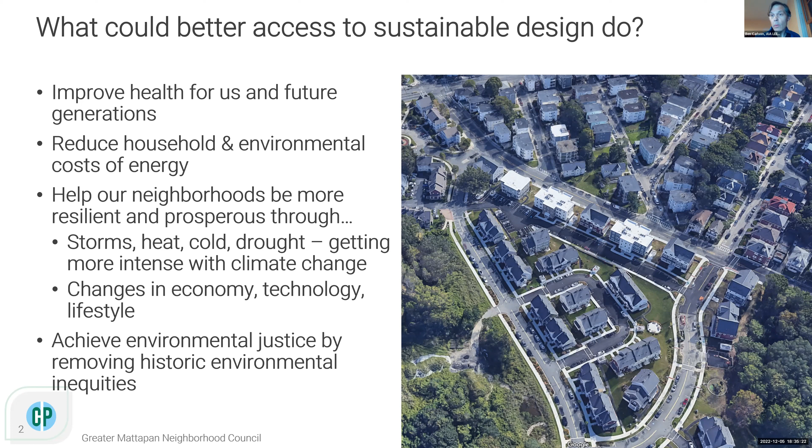And it can help with environmental justice, because oftentimes Black and brown communities have been impacted by too much loss of tree canopy, of environments that are not healthy, and so now we have opportunities to really bring healthier and better places to live for everybody.

So what does LEED mean? It stands for Leadership in Energy and Environmental Design. It's a very common standard for sustainable design of buildings, but also neighborhoods, and starting to be like city scale too. And you basically earn points.

There's different rating systems, but you can earn up to about 100 or 110 points. If you get 40, that's where you begin to certify a building that it's a LEED building. And then you've got silver and gold. But a lot of the strategies, you don't have to certify your building. There's still a lot of good ideas and strategies that can be applied on a small scale in our homes, in our yards, on our streets, in ways that make a difference.

So I'll skip over this, but that's what LEED is, just a prevailing set of environmental standards. I'll share some examples of the standards, I won't go through all of them, that would take a while. But the general categories, to give you an idea, are these.

One is location and transportation - that's picking a good place to build your building or locate your business or your home. And the great thing is Mattapan is already an excellent place. Essentially, what the location and transportation standards are all about is helping people live and work and play in urban neighborhoods. Mattapan is a great example of that, and not all parts of the neighborhood maybe meet the greatest standard in terms of access to transportation or schools or other things people want, but in general it's good. A lot of it is very walkable.

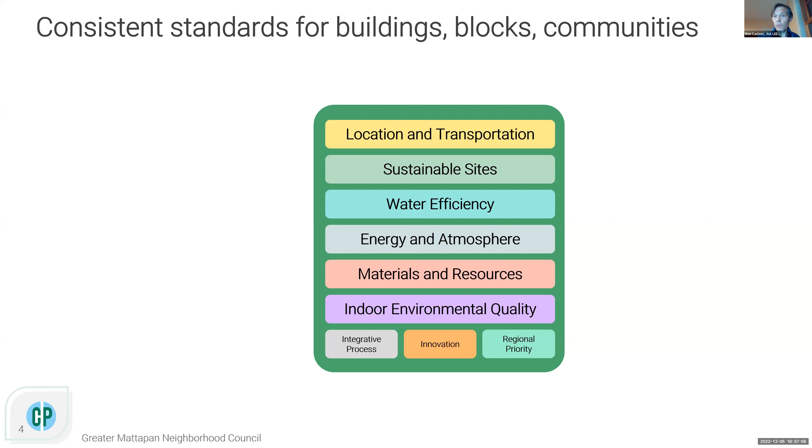There's water efficiency, which is using as little water as we can. A big part of it is energy and atmosphere, minimizing our energy use, reducing emissions into the air. Materials and resources - using materials for building that aren't causing damage to people or the environment. And there's indoor environmental quality, which is creating healthy interiors, places people feel good to be in. Those are the main categories.

And there's a set of standards that apply to buildings. This picture here is actually the Mattapan Public Library, which is a LEED certified building.

And then there's a set of standards that apply to communities. This is the Old Colony Public Housing, which is up next to the beginning of South Boston. That's a LEED certified neighborhood. But it's the same major themes that apply, whether you're talking about one building or a whole series of blocks and streets. So these themes really carry over.

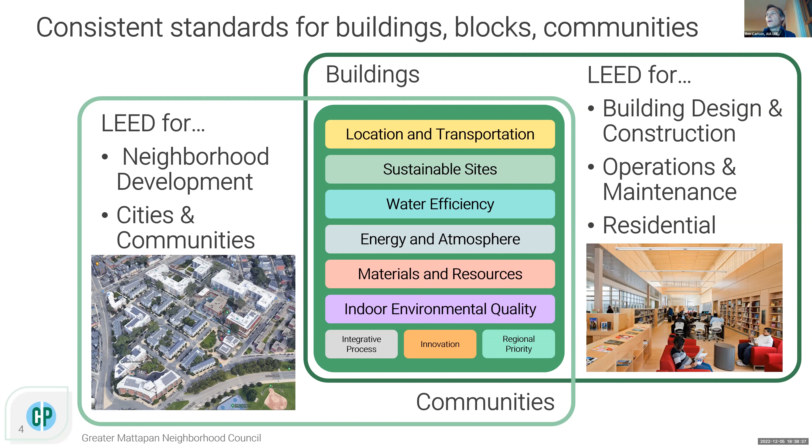There are other standards we won't go into in detail, but there's something called the Well Building Standard, which is about health, and it takes that a little further. There's Living Building Challenge, which focuses on energy - it also gets into equity and beauty. There's something called Passive House out of Europe, which is very common as well. And even Boston Schools has green standards, healthy standards for buildings. So there are a bunch of good models out there.

All we need to do is apply them and find a way to start applying them to Mattapan. So one of the perspectives to think about is tree canopy and heat, because those are a big part of staying healthy and reducing heating and cooling costs.

So I'm going to just quickly walk through a few example ways these might apply. I'm not going to read all the examples, but when we think about location and transportation, you get points for choosing the right location. So one project that comes to mind that's a good example of that is this housing that's, I think it may be done now - it's the old Cote Ford site, Cummins Highway, near the new commuter rail station.

And that's an example of a good location - I think, unless you live across the street and you don't like it - but it's a location that sat for years as an underutilized site, so it's good to get it back into use. Good to have people there and lights on, and you can easily walk to Mattapan Square, to the train and to the bus. So it's an example of a good location.

The city also has incentives for electric vehicle charging. So this theme sort of gets into transportation and access, and putting people's homes in places where it's easy and convenient to live and get to work.

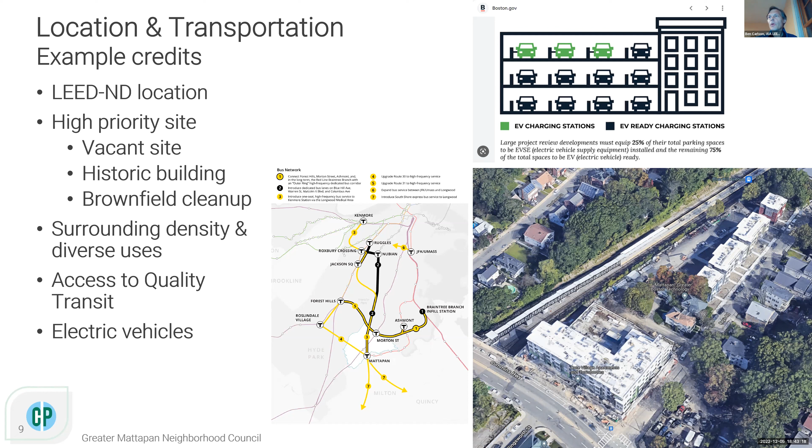Sustainable sites is a lot about green areas. It could be tree canopy, green areas at ground level, or on rooftops to soak up water. Green roofs are usually on flat roofs, but some people are even putting them on sloped roofs.

But how do we help a homeowner afford a green roof like this? Look at all this opportunity we have around Mattapan Square to green these roofs. This white roof here is going to keep things a lot cooler on a hot day than all these black tar paper roofs. So there's a lot we can do just working with our rooftops that'll make our environment more pleasant.

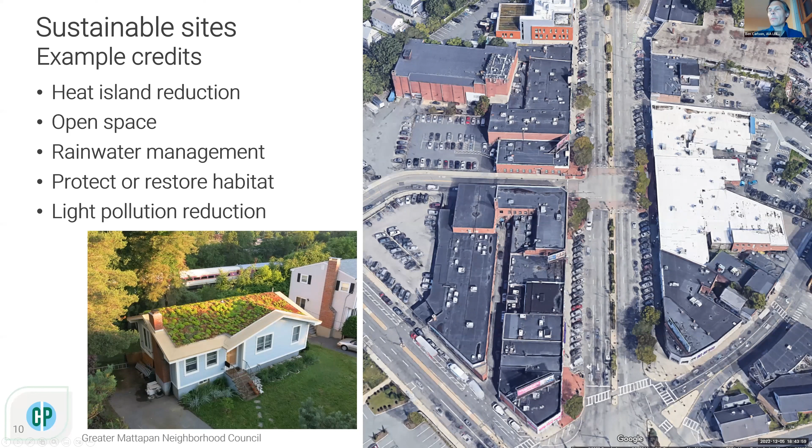Being efficient with water, there are toilets and other fixtures we can buy here in Boston that use less water and lower our water bills.

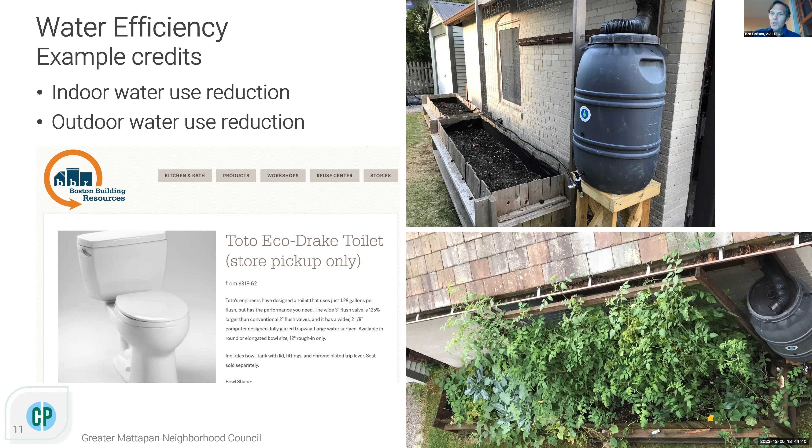This is actually in my backyard. This is a rain barrel that's useful in a couple of ways. It collects water off a roof. It helps nourish this garden, which is helpful when it's really dry. The rain barrel has also been helpful to me because, put in the right place, it reduces the water leakage into my basement, which used to happen when it rained a lot. But now the barrel is collecting that, it's not so much. So this is an example of a small scale, easy solution, but that helps.

So the other one, energy and atmosphere. There's a huge opportunity now where we have heat pumps, and believe it or not, it's basically the opposite of an air conditioner. Just as an air conditioner can make your interior cool when it's hot outside, the new heat pumps, even in a winter climate like we have, can make your interior warm when it's cold outside.

That actually uses less energy than a traditional gas or oil furnace, and it can use clean electricity. So there's a big opportunity, when it comes time to replace our heating plants, to use these more efficient solutions. It's also a lot about insulation, insulating our older buildings, putting in newer windows. If you're a business, it's also about efficient refrigerators and careful use of refrigerants so they don't escape into the atmosphere.

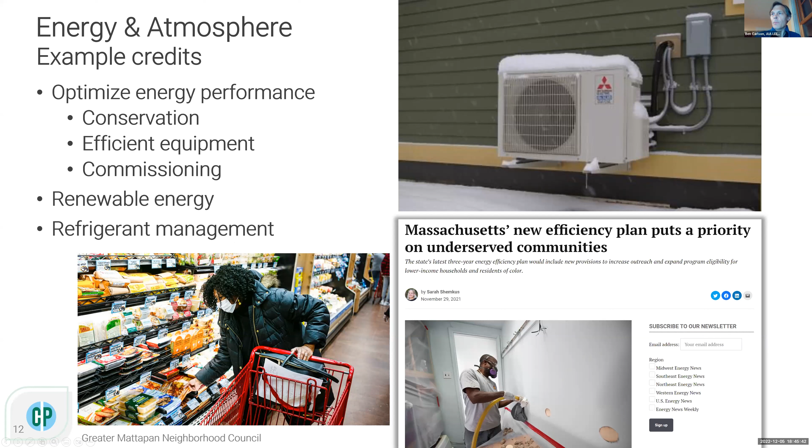Materials are a big thing. There's a movement now to use less steel and concrete because those produce a lot of carbon, and use wood instead, which is more renewable. The City of Boston is actually working with a local group of architects on some example projects, and so even 7-8-story buildings now are being designed that use big stout timbers for their support instead of steel and concrete. That's also being done in some smaller scale residential buildings too.

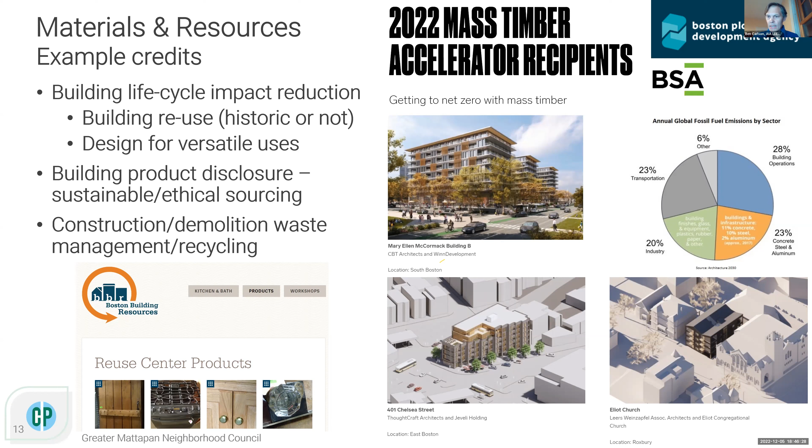We can also recycle. Boston Building Resources Center is a place where you can buy a door or a stove or cabinets that someone else doesn't need anymore, and you can reuse it again.

Indoor environmental quality is really about keeping us healthy. One example down here, these are actually some stains that I tried recently that are cleaner. They're not based on petroleum, so when you're applying them, they don't smell so bad and they're not bad for you. They do cost a little more, but they actually go a little further. So this can create a healthier interior, not just for residents, but also part of indoor environmental quality is for the environment that construction workers are working in too.

If you're in construction, this is important to you because it means fewer chemicals or other hazards. It also means getting good ventilation, but filtering the air to keep it nice and clean. The pandemic has taught us a lot of lessons about filtering air, but also just things like getting good daylight and views to trees outside.

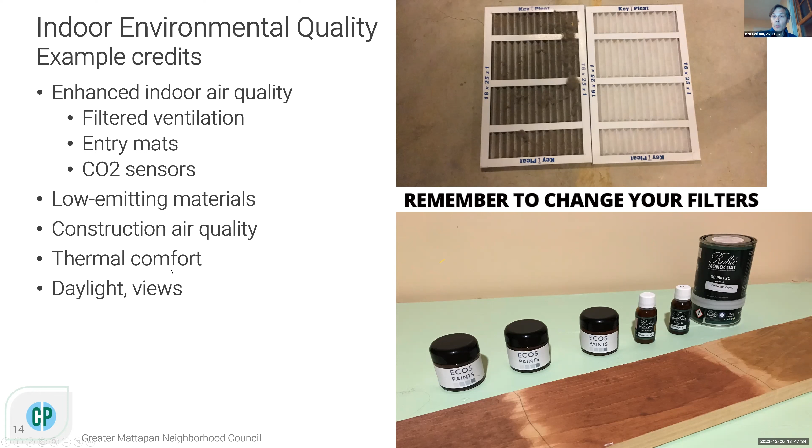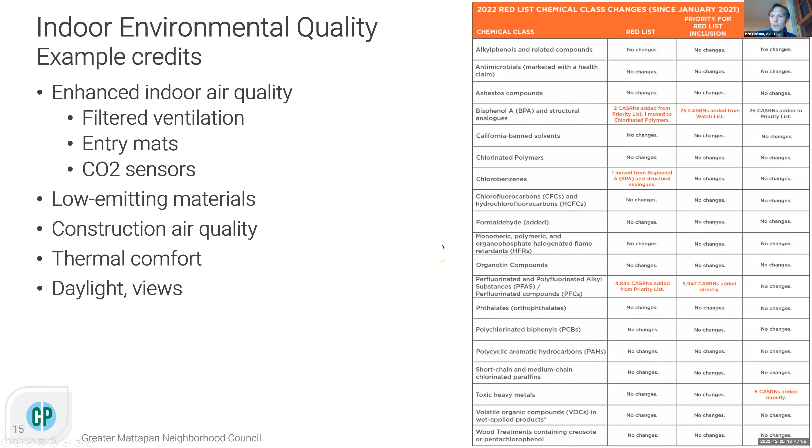Sustainable design can also help us be healthier and feel better. There's also a whole list out there of dangerous chemicals that we should not put in our buildings, traditionally things like asbestos, PCBs, and formaldehyde, but there are a lot of products you can buy these days that avoid all of these. So it's keeping us healthy and keeping workers healthy.

So to wrap up, because I know we're almost done, what do we need to actually make sustainable design attainable and affordable for more people throughout the neighborhood? We need money available, we need grants, a lot of investments, especially in insulation and in solar heating or solar power.

It can pay you back over time, but it might take 5 or 10 years. So you might want a loan up front to help pay that cost, so then you get it back later. It's about getting information, and it's about design solutions that work well for smaller houses, not just the bigger buildings that have been a lot of the green design focus so far.

If it's landlords, how can we think of ways that will encourage or require the landlords to improve rental buildings so they're healthier and cleaner, but in ways that aren't shifting the cost burden onto the renters? It may be that by improving rainwater management, we're making them less likely to flood. Maybe the insurance costs go down. Maybe the city could reduce taxes a little bit.

The city could also do things like remove for free some of the dangerous materials or the old oil burning furnace that's inside, to make it easier for someone to invest in sustainable design.

And then city infrastructure. This is the intersection of Blue Hill Avenue and Morton Street. There's a lot of asphalt here, and there's the police station here with a lot of dark rooftop. So there's a lot of space where the city can work directly to plant trees, to add landscape space, do things that make it more comfortable and healthier, but also a more pleasant place to walk and to be. So a lot of opportunities to work with the city, and for the city to work with other agencies, the T and others, to get more money and make investments that make Mattapan and our other neighborhoods more sustainable and healthy. So I'll stop there, and happy to take questions, or we can move on to the next item.

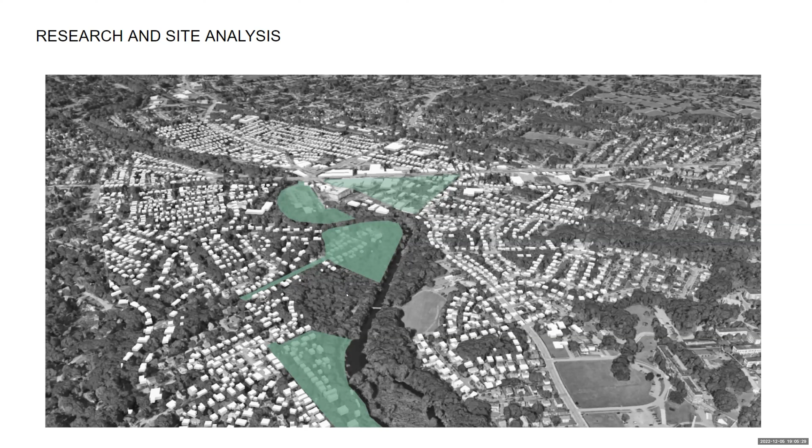For starters, I'm sure everyone here is familiar with the area, but starting in the beginning of September, when we started to look into the area, we wanted to hit the ground running for those of us who weren't familiar at first, and see what were the experiences at each stop, what were the discrepancies in what you would be getting at each stop, and what kind of makes you want to get off at each stop, and what makes you want to stay at each stop eventually. If you go to the next one.

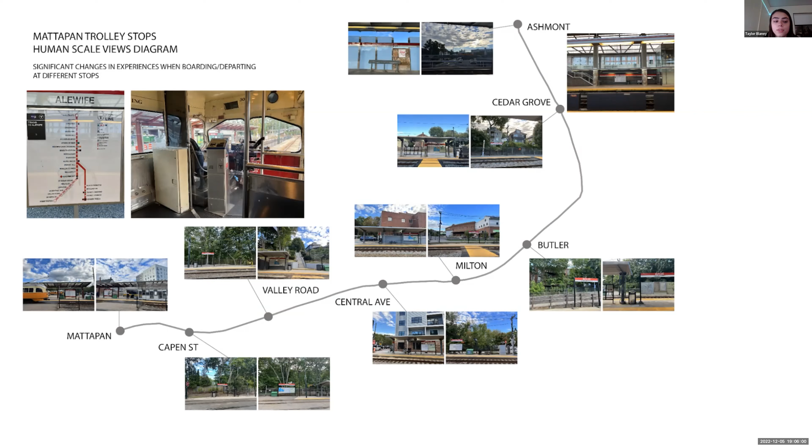So we started to research the ridership demographics, because that wasn't very public through MassDOT or the MBTA. We actually researched using 4 different times a day, and different age categories between child, young adult, adult, and senior, counting how many people got in and out at each stop and averaging that total. Obviously, Ashmont and Mattapan were large outliers, being the beginning and the end of the trolley.

And how we kind of started to categorize safety data, designing for safe spaces — what do those components look like? So we had 4 different categories: eyes on the street, what are you seeing, and what sort of residential, commercial, or retail public buildings is there access to?

What do you have that kind of makes you intrigued to get off at the stop? Lighting at the stop — how well is that taken care of — and lighting 5 feet in each direction of the stop. Do you actually want to continue at each stop, or do you want to stay and maybe go to the next stop because it's not well lit enough?

Access to services — can you park your car there? Are you going to be able to walk? Do you have access to the greenway or the river? Biking and general signage and direction. And then security infrastructure: security cameras, MBTA attendants, and emergency blue light boxes.

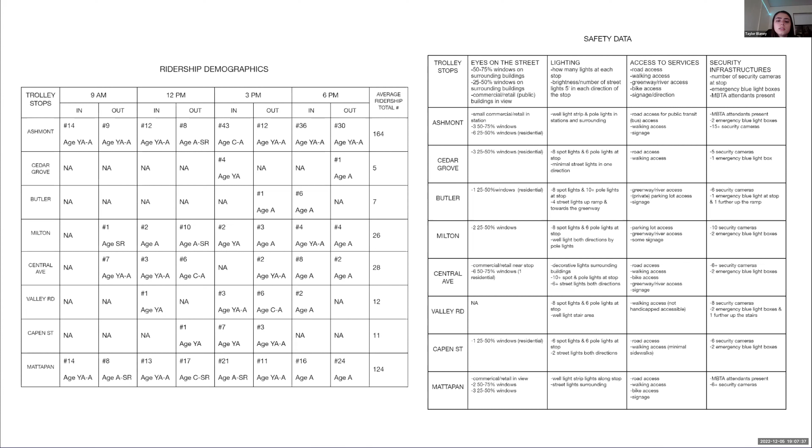And sort of conceptualizing based on the average ridership — what is this looking like? Obviously, Mattapan and Ashmont were so large they kind of get knocked off as outliers. But why are some things safer? Are more people using it because there are certain design concepts that make it feel safe, or were they specifically designed because more people are using them?

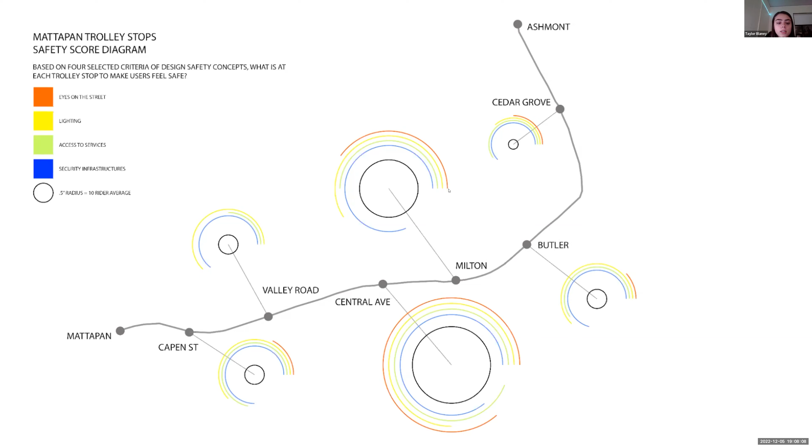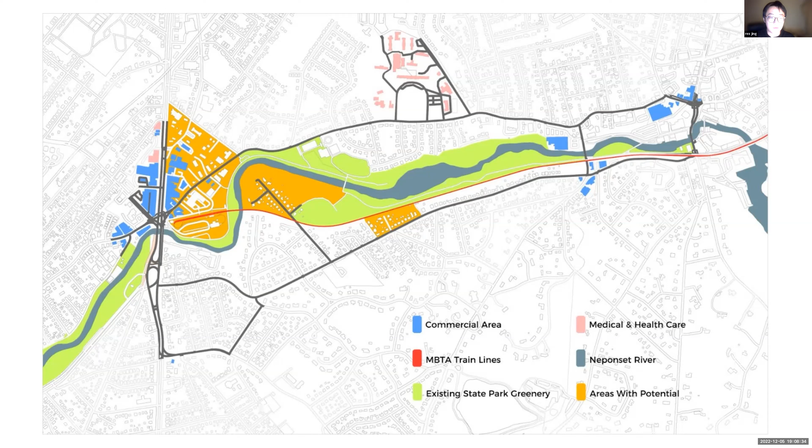This map shows, firstly, our interesting areas. We saw there are 4 really potential areas that can be improved in the new levels, and also shows the ratio between nearby commercial areas and also with medical and healthcare. I think in this map there's a specific ratio between each part that is our focus point.

So then we started to gather a lot of interest not only in the Mattapan station stop, because it is so popular being at the end, but what experiences are you getting at Capen and Valley that are less used, that would start to branch away from Mattapan? How can we bring that sort of popularity and life back into those stops, and what experiences can we start to mimic from the Mattapan station that would give a sense of placemaking and destination for more people to want to use those stops?

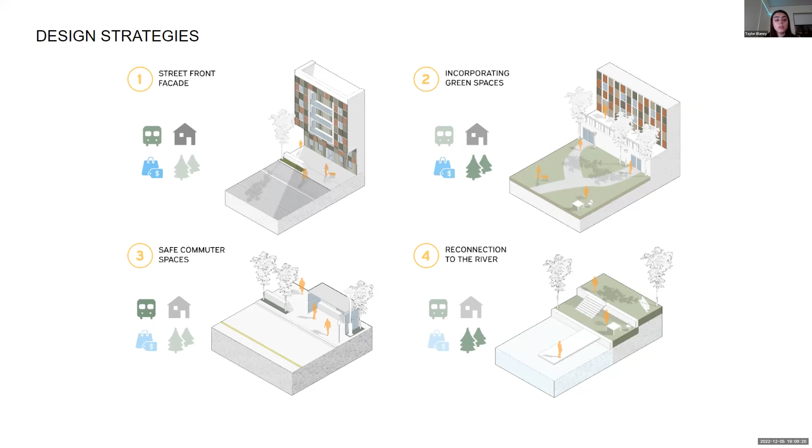So these are just 4 concepts of design strategies that we wanted to implement all throughout our proposal. So if we want to go into detail about those.

Yeah, so our first one here is a street front facade — how we can improve walkability, how you can make it safe for people walking along.

Nathan, can you speak up please? Yeah, thank you. Actually, if someone wants to take over, I can change my audio settings real quick — one of the group mates texted and said I was kind of quiet.

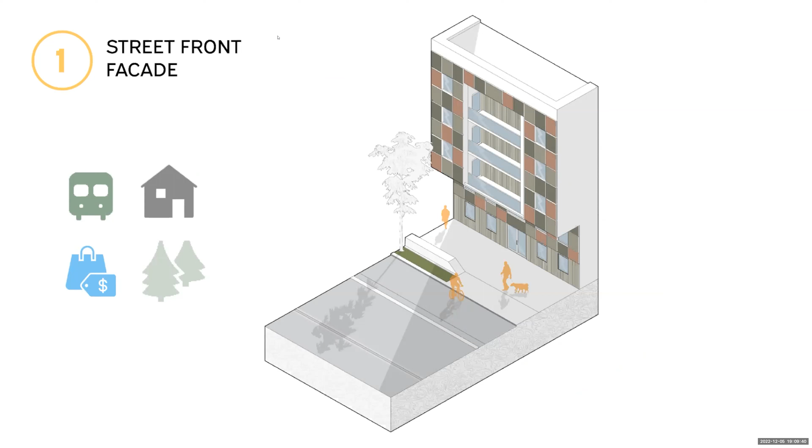Yeah, so the street front facade — we're focusing on how the commercial versus the mixed-use housing compares, how we can start to incorporate that a little more and make it more inviting. Bike lanes, incorporating green spaces, tailoring this to each space that it needs to be put into.

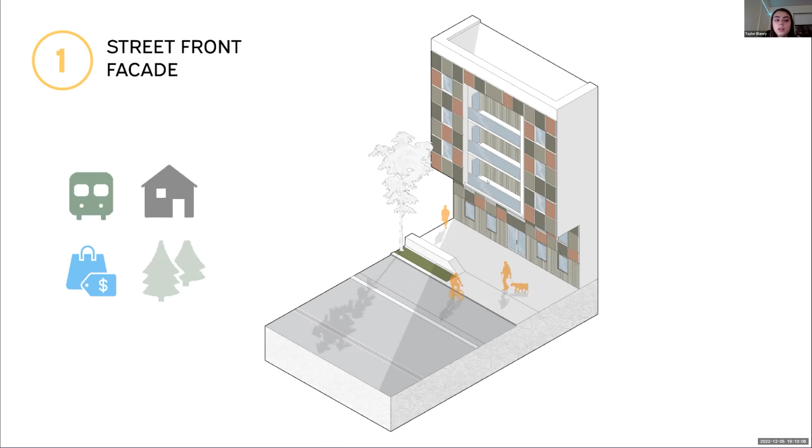We're ready for the next one. I want to see, is the audio okay now, or is it a little bit better? Okay, awesome, thank you.

So this one's focusing on how we're going to incorporate the green spaces. As you'll see in a lot of our projects and ideas, we use a lot of green space — that was our key focus, how we can improve walkability and transportation, and how you can interact with the buildings you're going to ideally create in these areas.

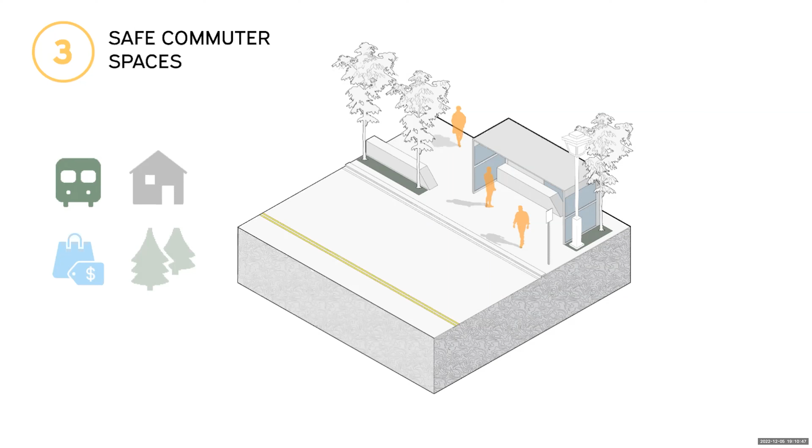And this one is looking at safer commuter spaces. This is an example of what a bus stop would look like, but you can bring these ideas of green space and these little moments that make you want to go there into every stop we use. You'll see on our different T stops and bus stops, we implement the green space into those as well.

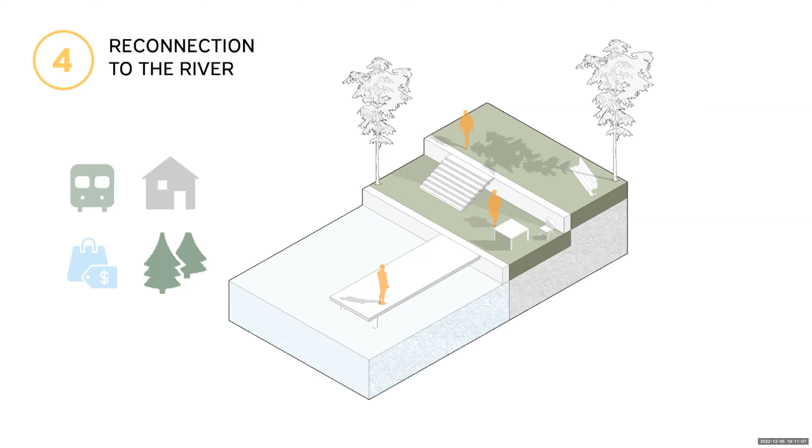And then another thing you'll see on a lot of our projects is this reconnection to the river, where we want to bring the community back into the river by using this kind of terracing that brings you down to the river. You'll see a few of the sites will have a boat launch, which is something we experienced while we were there, and kind of wanted to bring that over to our side of the projects as well, and really just make it a more enjoyable space than what it seems like it is right now.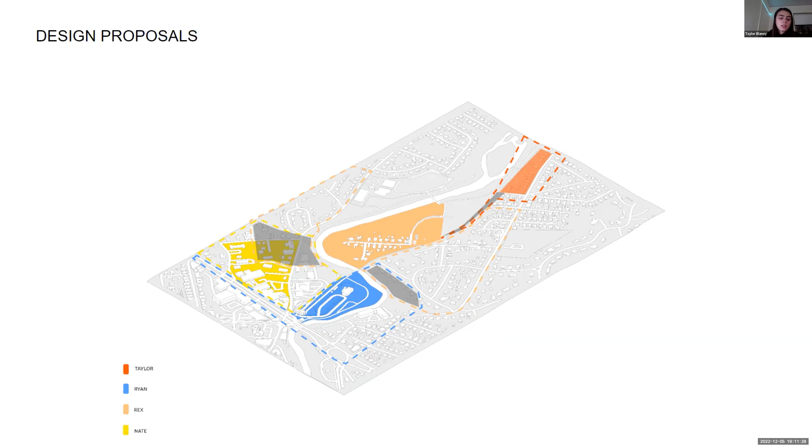So for our design proposals, we each focused on 4 specific spots and looked at what's the area that those are going to start to expand and overlap, and on different scales, how are these going to affect communities.

So if you want to take it, I can. No, you can go for it.

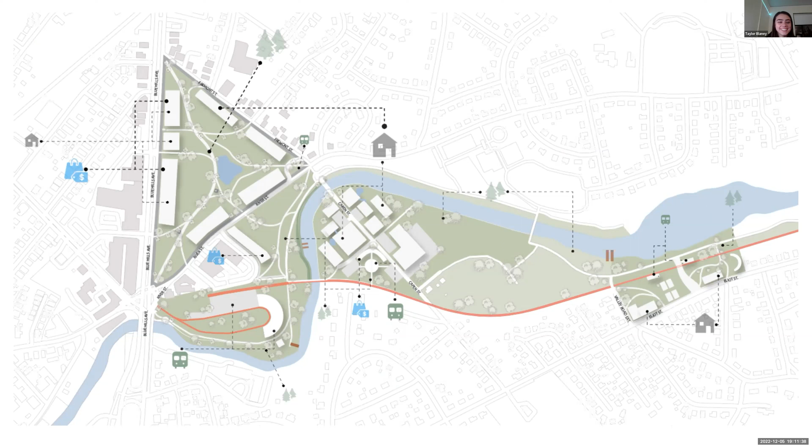All right, so here we have our overall site plan, looking at what each project is going to look like. Just a quick overview, like roof plans of it, showing how each one's going to tie into each other through the greenway running right here. You'll get that terracing on some of the waterfronts, and you'll see where the boat launches would ideally be, and where the red line or the trolley line is going to run through, and how we wanted to tie everything together.

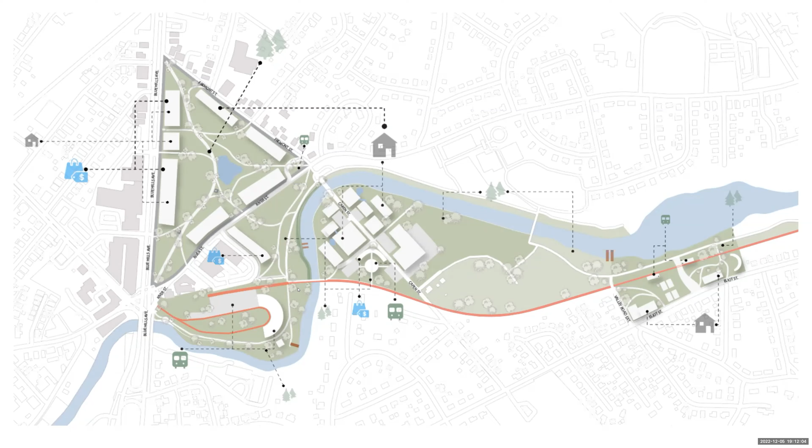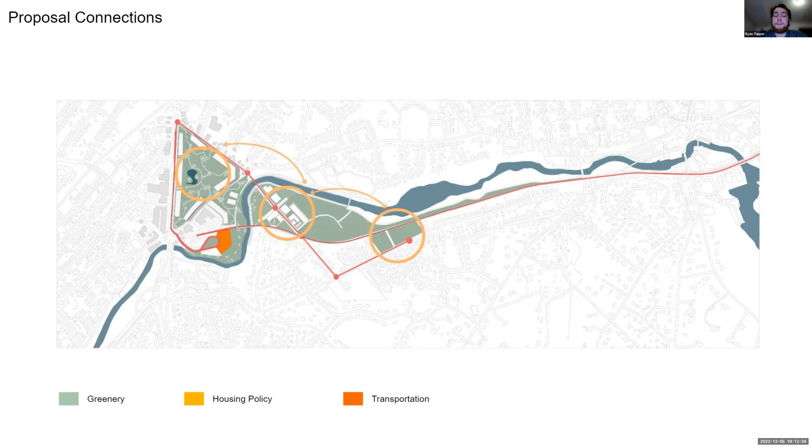So here we can see some of the connections that we're proposing. What we want to talk about is how there are many connections throughout that we need to expand upon and utilize. We can see that throughout Mattapan Square and the Milton area, there are natural connections, but they're not actually connected. So what we want to do is make sure that these areas in Milton and Mattapan, on different sides of the river, are actually connected, with an easy way to get through to them and bring both communities together.

For one of our first proposals, we came up with the Mattapan Commons, taking some design cues from the Boston Commons itself, creating a huge public space that the community could use and basically help develop the community around this development itself, tying into what's there already.

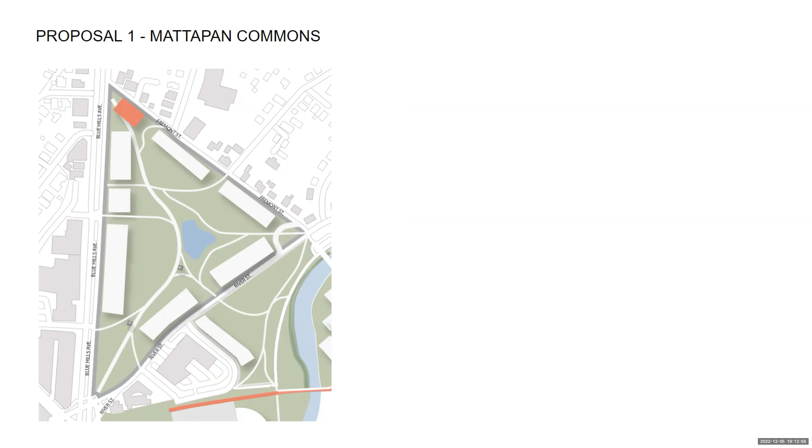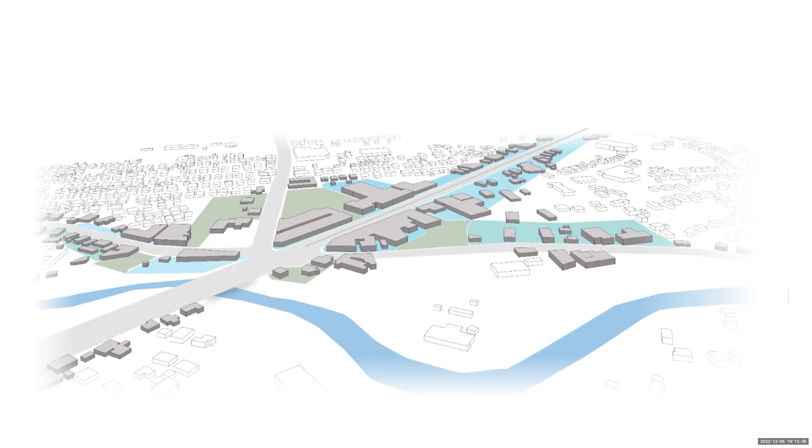Looking at just an aerial rendering of what that could look like really quickly, showing how the green space itself would work and how the circulation would work throughout that.

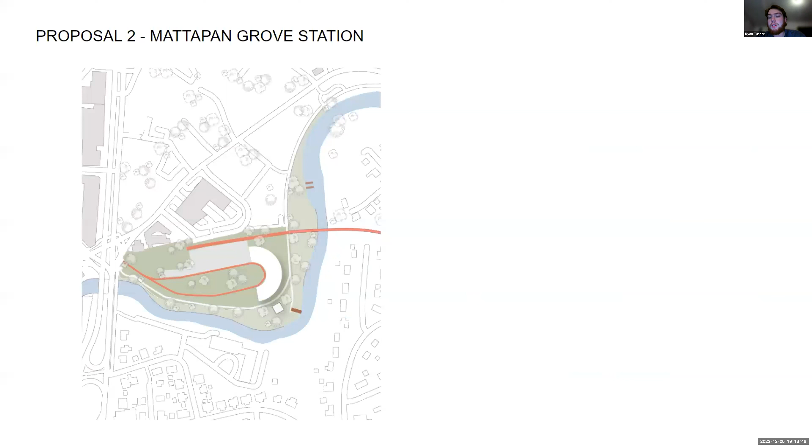So for this proposal, our main distinction here is to change the Mattapan station into the Mattapan Grove station. What we do with that is it would create placemaking, create a destination that people would like to come to, and bring both sides of the river together.

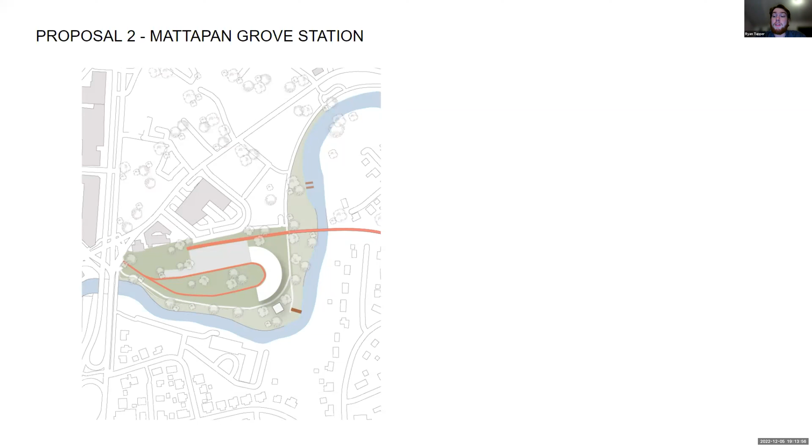So here's what it could look like with our improvements and changes. We're going to talk about each one of these, but as you can see, it's drastically different from what it looks like today.

So here we're going to do something with the public transit. We know Mattapan Square is a pretty busy area, with a lot of buses, people, commuters, cars and traffic, a lot going on there. So what we want to do is make it so there's not as much going on, and the things that are going on are controlled.

One of our first ideas here is to connect between Milton and Mattapan with another bridge over by Capen Street there, and by that Apex bus stop. As you can see, the new proposed bus line would actually circumvent Mattapan Square itself, and then connect back up to Blue Hill Ave a little bit higher, up near the Commons project.

So what that would do is bring the large buses outside of Mattapan Square itself, but in keeping with the movement of the people and making sure we're not taking anything away, we propose a connector trolley line along Blue Hill Ave that will serve that need, while keeping rich with the history of Mattapan Square itself.

The connector line would be a single train car that goes up and down Blue Hill Ave, with multiple stops allowing for easy transit. Its end stops would be Mattapan Station and up by the commuter rail, giving us that connection, because right now there's not much link between the commuter rail and Mattapan Square unless you walk or take a bus.

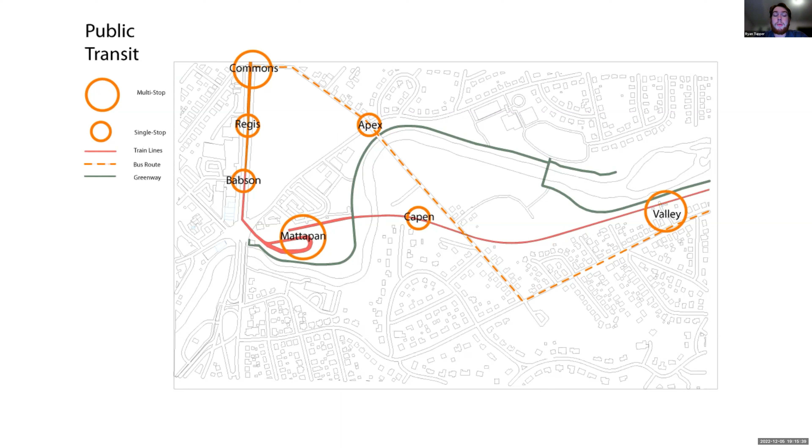So with designing the new station and the new connector rail, since the new Red Line cars are omnidirectional, we no longer need the turnaround in Mattapan Square, but we do need one for the trolley. So we propose reusing and revitalizing the old trolley that's there right now, keeping it in use along the connector rail, and also turning it into a museum for the trolley line and the MBTA in Mattapan Station and Square, so it becomes something people want to go learn about and see.

You can see here that we've taken the turnaround, moved it a bit, and turned it around so the trains can now go the other direction instead of just back towards Milton and Ashmont, going back up and around instead. Those two tracks actually meet and create a moment where people have to interact and connect with each other before moving between different rails or back into Mattapan Square itself.

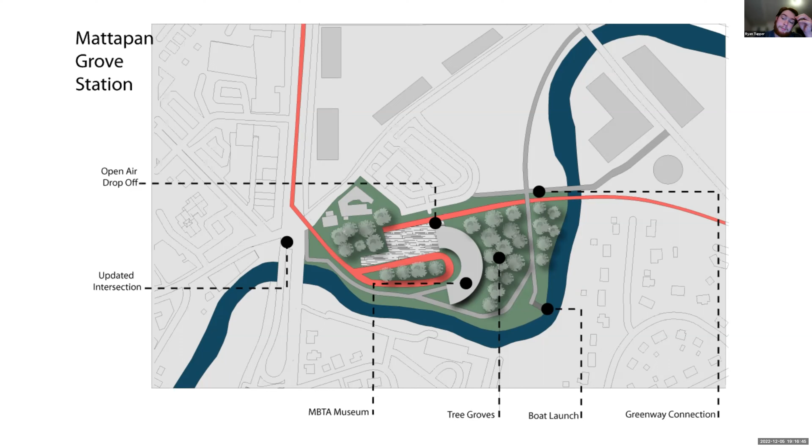This is looking back at the actual intersection itself. We looked through all the MassDOT data on crashes and figured out why they're happening, what times, and who's causing them. We concluded it's mainly during commuter rush hours, but not many people are distracted — they're just getting into trouble because there's too much going on and they don't realize what's happening. So we want to make it easier and more straightforward.

So what we actually want to do is add some things — I know that sounds crazy — but with the connector rail, it creates a moment along Blue Hill Ave where there are things on either side, so people will go slower. It's a perception thing: when there's a lot going on around you and things are bigger than you, it makes you slow down and really take in what's coming.

We've also revitalized how the connections happen. Right now the square has five different roads meeting into it, which is another cause for concern. So we looked at the traffic patterns and realized that if we limit those interactions, we can improve things. We've limited the types of turns — you can only turn right, not left — because there are other connector roads around Mattapan Square that are very underutilized right now, which we can use so less traffic goes through the square itself.

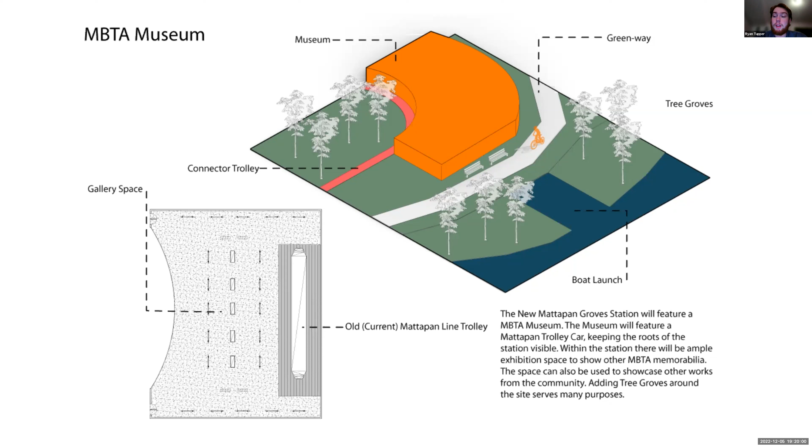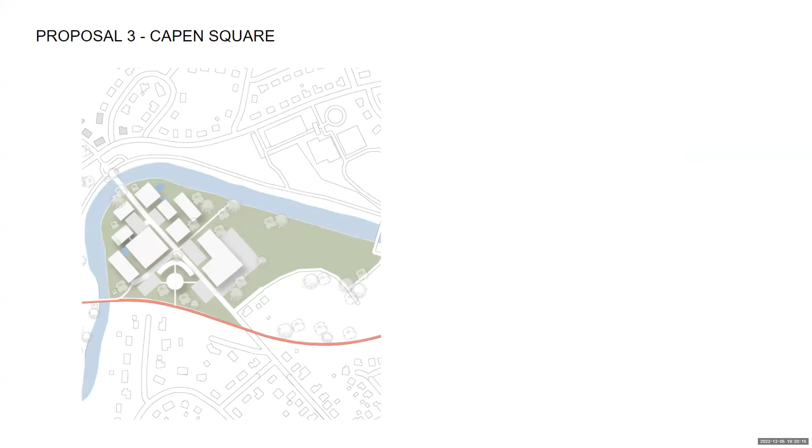In this proposal, our target is to connect the two side communities of the Neponset River by redesigning the Cummins Street community and also extending Capen Street.

That's the overall look, and so we try to create walkable greenery and multi-daily services stations by reactivating this community.

For the logic of breaking down the wall, firstly we will insert medical healthcare to support daily life requirements for these local people, and also insert commercial areas and multi-use greeneries for more activities, and insert a new housing project to support the local communities.

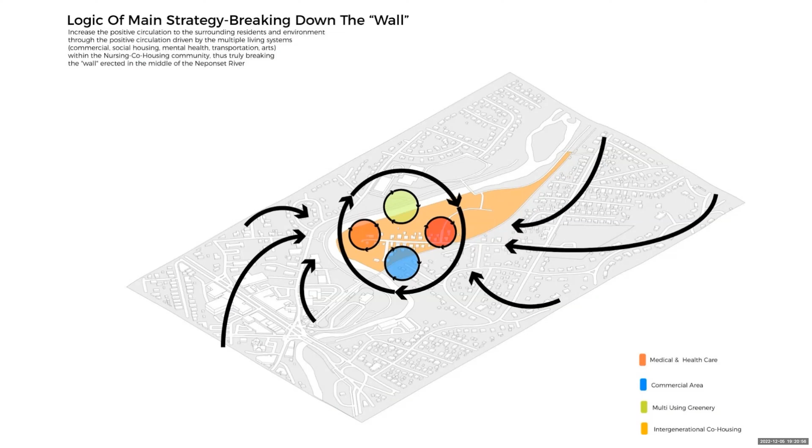So these are the potential areas and the major surrounding incidental areas, and we try to use this proposal to give a positive influence to the surroundings. It's not just rebuilding new stuff.

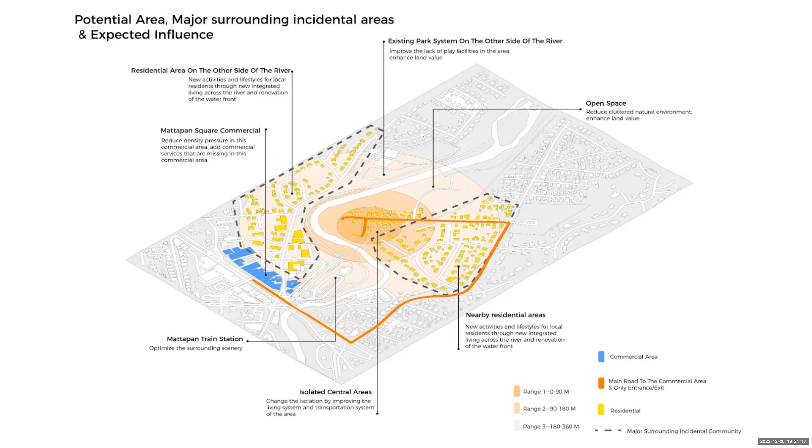First is intergenerational co-housing. For this project, we try to put multiple groups of people together, such as people with disabilities, people with mental health issues, and normal people, and each of the groups can be responsible to these communities in their own ways. For example, the disabled can provide artworks to support local communities, and the normal person can take care of the special groups and give some help, earning some feedback from daily life costing.

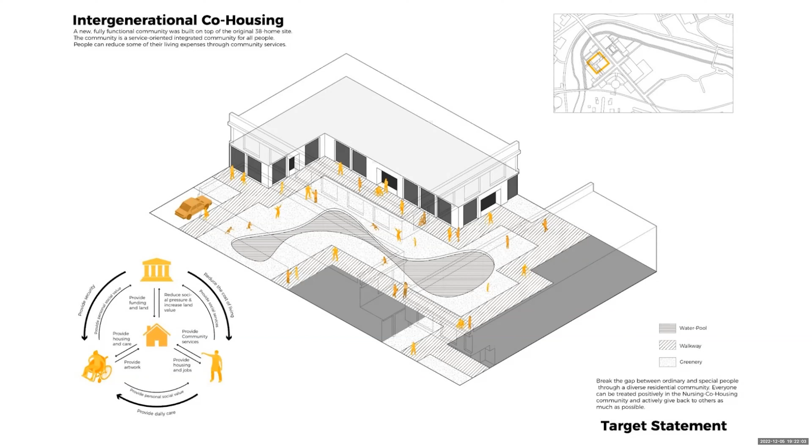For the health centers, we separate them into daily life clinics and mental health treatment. The mental health clinics are separated into kids' use and adult use.

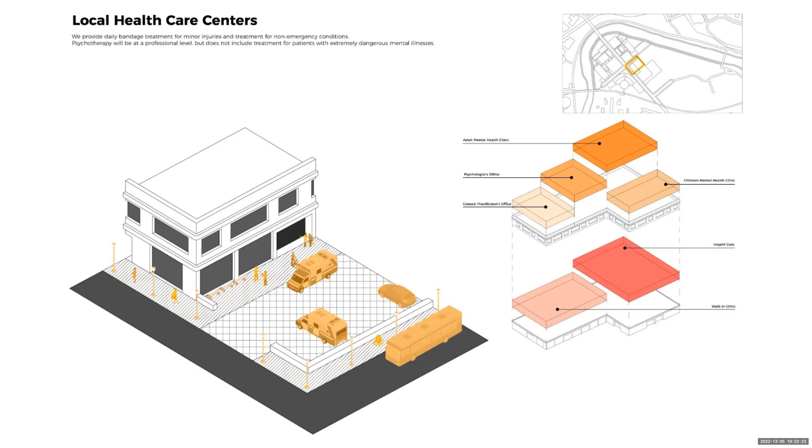For the stations, we will rebuild them. The station is mixed use with galleries. So that's the overall look for the stations.

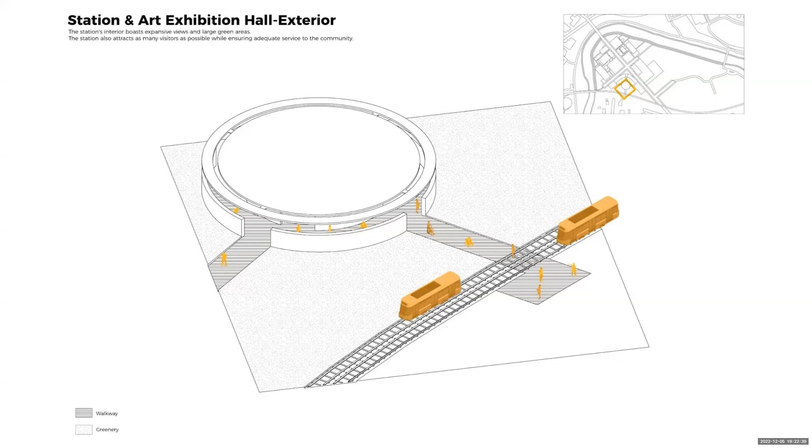This one is more about functions. As you can see inside the stations, there are huge galleries, and it doesn't cost any money to take a tour of the whole gallery. But if you want to buy a ticket, there's the option to donate to support local communities or special groups.

This one repeats. Next one.

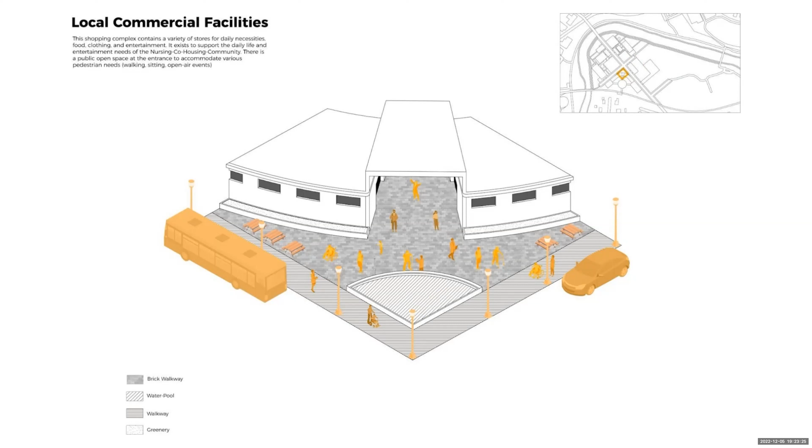For the local commercial areas, we built multi-commercial systems to support the daily life of these communities, so they don't have to take a long drive to go to Mattapan Square. That's more helpful for some special groups in this community.

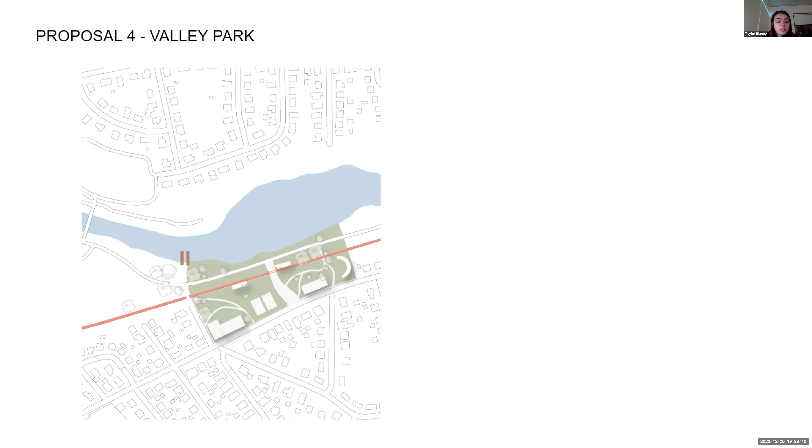Proposal 4 is at Valley Road Stop. The main issue is that it is not ADA accessible, and it doesn't have any connection back over to the other side of the river. There's no sense of placemaking when experiencing the actual trolley line. Mattapan Square is such a lively and amazing space, but as you get more towards Milton, there's such a missed opportunity with connection to the river and open space. It's really just people using it to get to school or work. Nobody's really trying to spend time on the Greenway, and there's actually no connection to the Greenway.

It's fenced off because of the topography at Valley Road Stop. So the proposal idea here is to reconnect back across the trolley line, figuring out some of the topography, opening up the green space, and reintroducing mixed-use housing, with community recreational space on the bottom and housing on top.

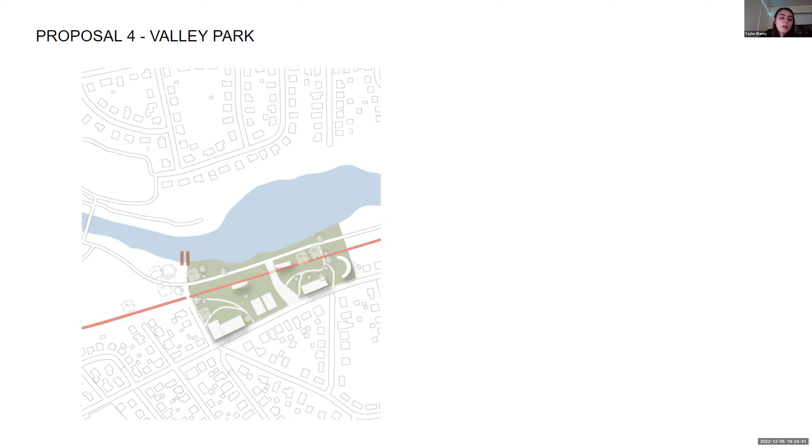So the real experience we thought was, you have to get off at Central Ave and walk approximately 20 minutes to get to this point at Valley, and that's a misconnection for being on the Greenway. So opening it back up and crossing across the trolley is really important.

We have a kayak boat launch to get down and experience the water, with that terracing, and a proposed bandshell seating area, so there's space for people to use in the community and reconnect, a sense of placemaking. You don't want to just get off and go home, you want to get off and maybe spend time with your friends—it's intentional.

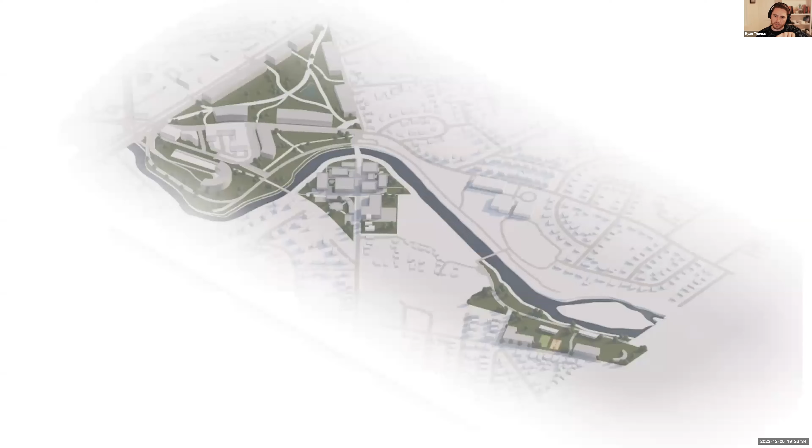It was very detailed—when did you start gathering the data? In September, just this past September. Well, I can tell you that you have a lot of data that a lot of people would love to have similar data for, like for the buses as well. So I really appreciate your detail and out-of-the-box thinking.

Just as a sidebar, where are you guys all from? Are you from Massachusetts or not? I'm from the Worcester area. Okay, I'm from the Worcester area as well. I'm from Maine. You're from Maine. Okay. And I'm Rex, from China. You're from China. Hey, yeah, nearby. Yeah, okay.

Let's see where we started with questions in the chat. I can address that at the moment. So we looked at these with about a 5-year plan and what we can accomplish within 5 years. We think most of these can get done within that time frame, so that's what we're looking for.

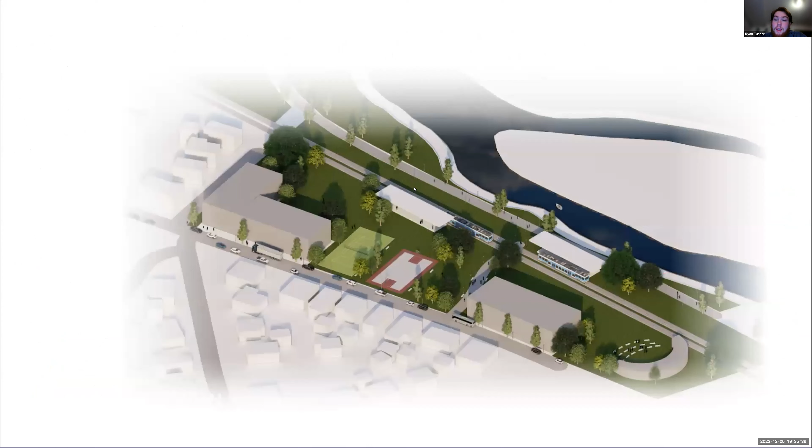Yeah, so that crash data is directly from the square. What I did is I went into the MassDOT data source and created a box around it. I can actually share my screen and show the actual crash points if you'd like - can you just explain the difference between what we're looking at?

So to control that traffic, we want to make sure we have direct paths and know where everyone's going, so there isn't much leeway. We can control it all so we know where people are going, to make sure it stays safe and efficient for everybody.

The data itself is derived from the MassDOT website, and we've pinpointed each and every crash location and figured out where those hotspots are. From that, we tried to identify why those hotspots are happening, instead of just getting rid of them.

Okay, so did you look at it at different points of the day? Yeah, what I did was take the last 10 years of crashes throughout the day - I looked at each time, who it was. So I took a pool of data, sifted through it, and categorized each crash. From that, we can understand what each crash was, and used that to create these results.

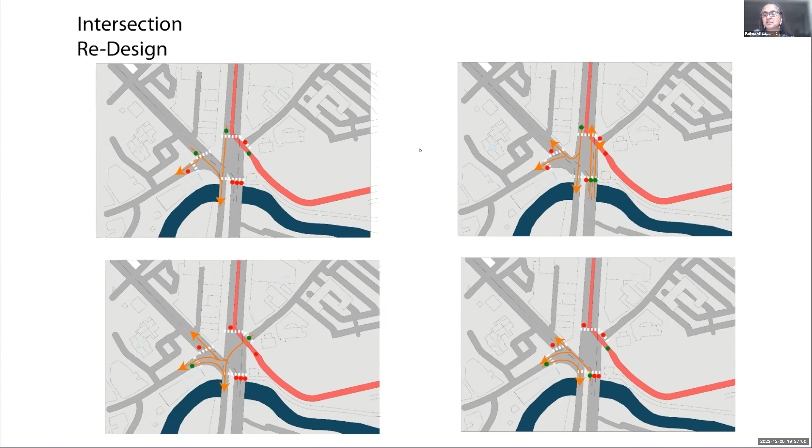Leah Dutton had asked which streets. Leah, do you want to ask your question? I was just curious, is this Blue Hill and Cummins Highway? It would be Cummins Highway, Blue Hill Ave, River Street, where they all meet together in Mattapan Square itself. And because of that direction, the street goes one direction and loops around already - down there it loops again. Okay, thank you. Thank you, Leah, for your question. Very helpful.

And are there any other questions that others have? Any raised hands? I don't see any. Anybody else see any?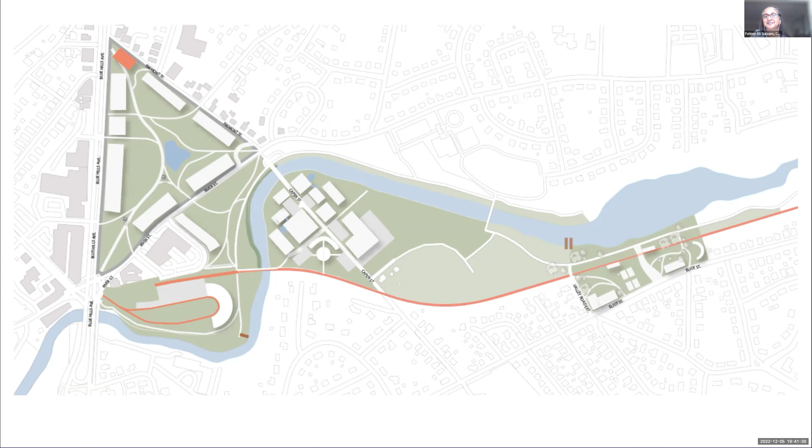Very, very wonderfully done, well thought out. I commend the presenters. It shows that you did a lot of great thinking in consideration of people and how they live their lives, and take consideration of our neighbors, bringing us more together instead of setting up barriers for each other. I appreciate it, thank you so much, as well as others. We appreciate the time. Thank you, thank you all, thank you guys very much. Appreciate all your thoughts and comments. Thank you. Look forward to seeing what you guys do next.

All righty, we're going to move on now next to committee reports, GMNC committee reports.

Matthew, do you want to start with public services? Yes, I'd be happy to. And I apologize, I haven't sent out our normal notice for it yet, but we will be meeting tomorrow night. Typically I wind up sending those out when somebody emails me and says, hey, can we talk about this month? And so far nobody has, so we don't have any agenda topics. It'll be a free form meeting.

Maybe we'll do a little recap of that presentation we just heard, which was an interesting one. And we'll have an open space to talk about whatever folks are interested in. We did not meet last month in lieu of our election, so thank you to all who spent your public service committee time out doing the public service of voting. We'll be picking it back up this month, tomorrow night. Like I said, open agenda. So I look forward to speaking with those who are able to make it.